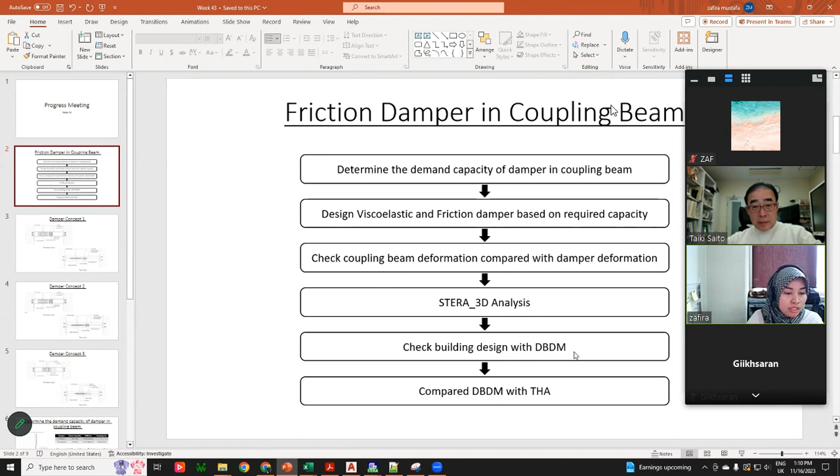So we're thinking about a few concepts. The first one, this is the viscoelastic material, and on the right side is the friction damper. Can you see properly? So here, yeah, this is concept number one. We don't know which one we should choose.

It deforms vertically. On the right side we have 4 bolts of friction damper with the spring washer, and on the left side we have the viscoelastic damper. These 4 bolts are just to hold it, they don't act like a friction damper, just to hold the viscoelastic in place so it doesn't separate when it deforms.

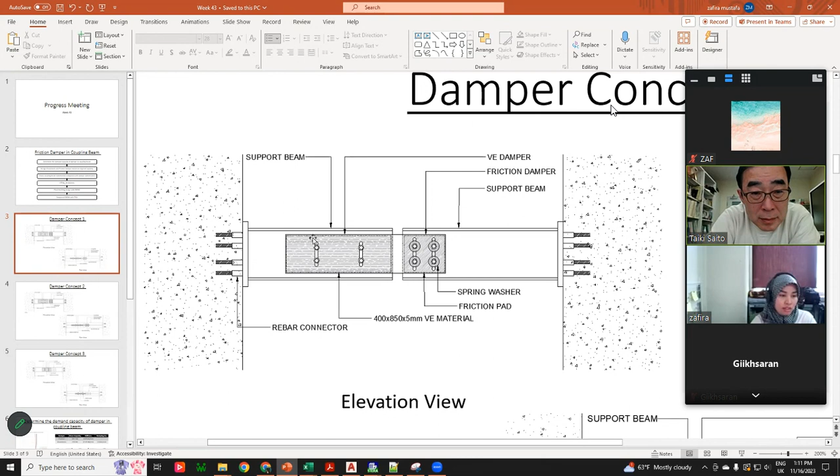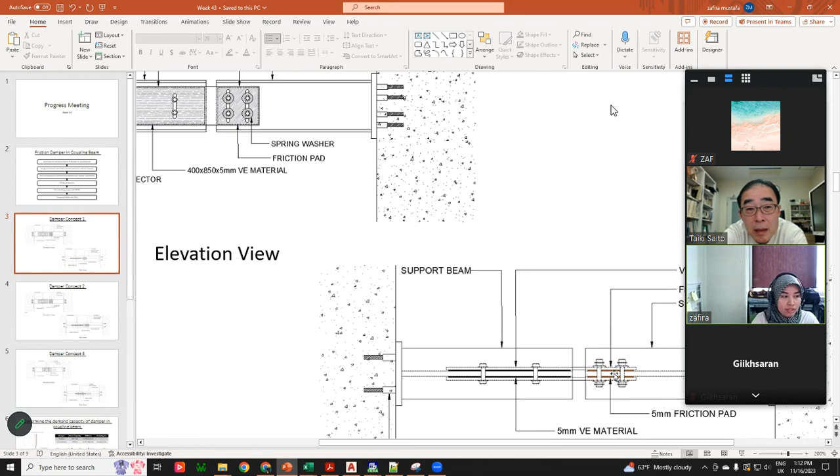And this is the plan view. So we can just use 2 layers of viscoelastic material. And for the friction damper, they also have a friction pad. This is concept number 1 I was thinking of.

So for the friction damper, it can deform vertically. For the viscoelastic, it can deform horizontally. And how does it work? How does it work? I mean, can you draw the picture of the deformation?

So this one is able to go on this side, and this can counter for axial load, so this is for shear. But can you draw the picture? Show the picture. Suppose it goes, the wall deforms like this.

For this one, it can be deformed. One goes down, one goes up, another one goes up. But this is only vertical deformation, one goes up and one goes down. And this one is two directions, one goes up, and this also can counter for axial load.

So, and the friction damper is attached to which part of the beam? One more time, Sensei, which part the friction damper is attached to. I mean, the beam is separated, yes, in the middle, right?

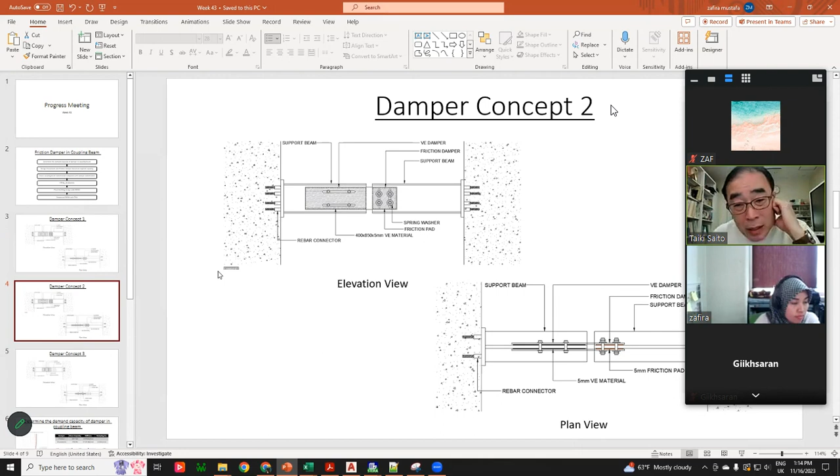Yes, so the friction damper is... this was the idea we discussed last time. So one side is friction damper, another one is viscoelastic.

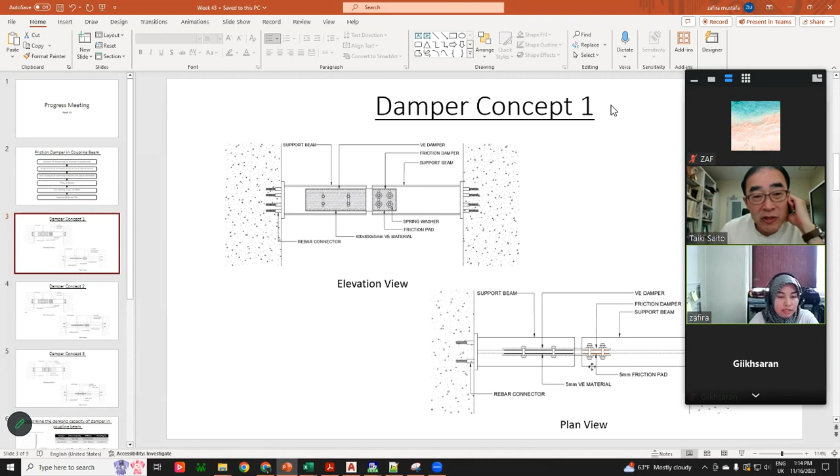So this is one steel panel, one steel panel, is that correct? This is from the plan view, the cross section. So we have two support beams, left and right, and this is the friction damper, and this is viscoelastic.

So the plate connecting the friction damper and the viscoelastic damper, are they the same plate? Yes, yes, yes, Sensei. These two panels, right, Sensei? These two plates are common. Yes, this is one.

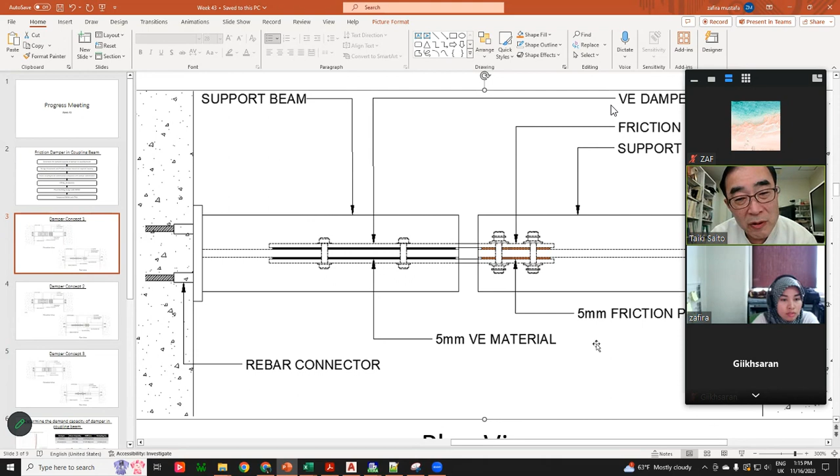So I cannot imagine how it moves. So supposedly one should go down, up, and this one should go down when the wall pushes this way. So this wall will go like this, and then it will go down. So one goes up and then one goes down.

Could you draw a picture of the plate? I mean the friction damper and the viscoelastic damper. So it should be like this, this one will be close to here, and this side will be close to this side.

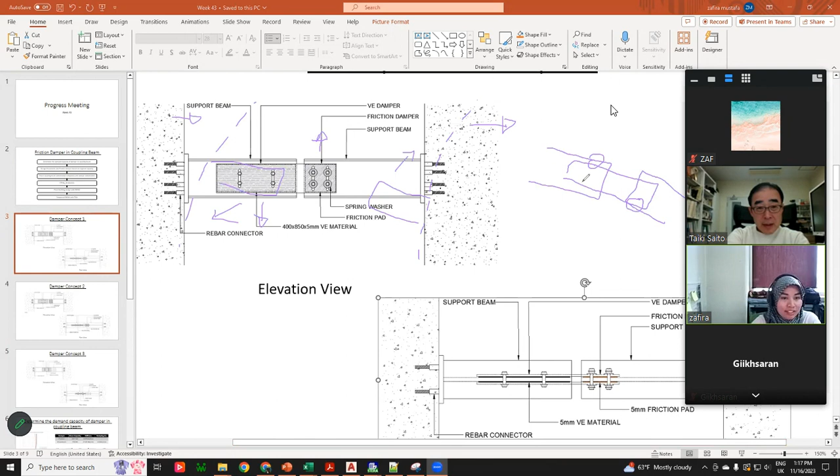Okay, anyway, could you draw it exactly? I mean the deformation, the information of it. On the screen? No, later. Handwriting. Okay, but I understand the concept.

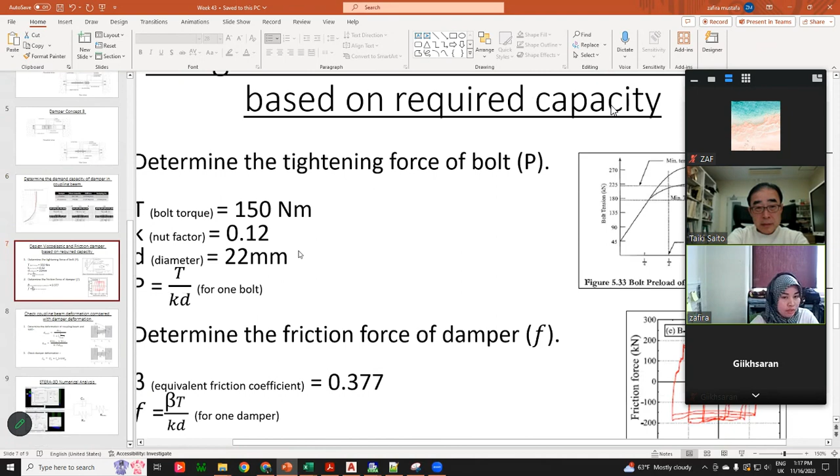And then, here I also found a few papers that determine how to calculate for the friction damper. First we have to determine the tightening force of the bolt, and then we can determine the friction force of the damper. Most of the papers say the maximum friction bolt force is about 200 kilonewton. And this is how we calculate the deformation of the damper or the beam by the deflections of the wall and coupling beams.

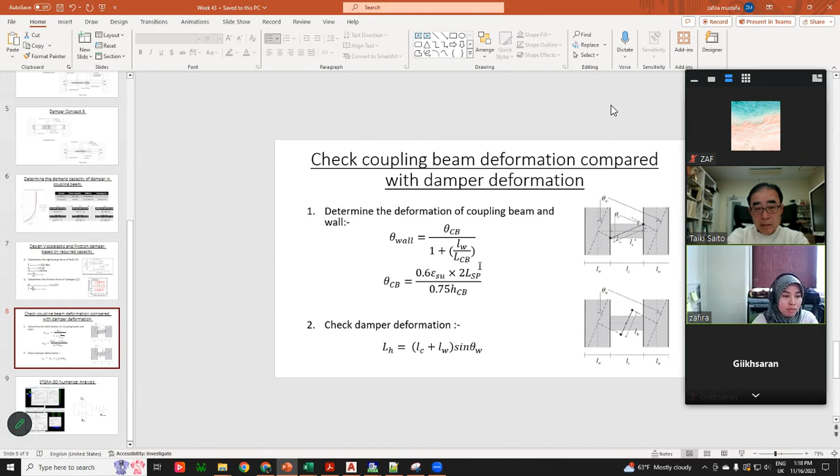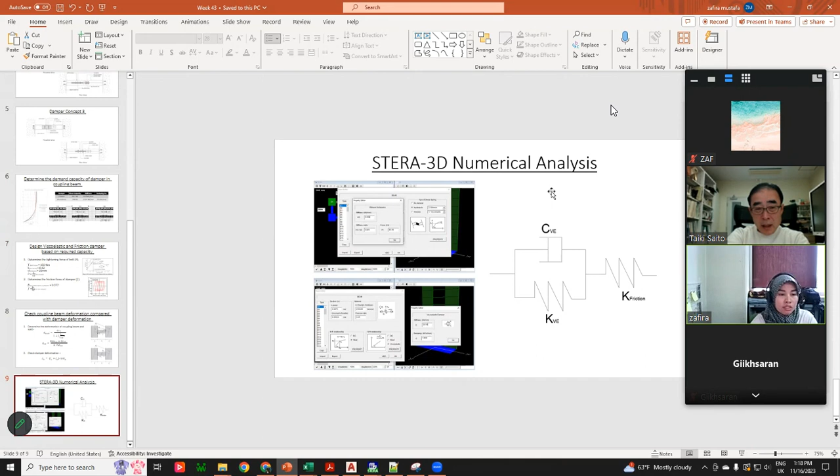My question here is, if we want to make two different dampers in the middle of the beam, how can we input that in STERA-3D? Because now for the friction damper we can use bilinear hysteresis, and for the viscoelastic we also have a viscoelastic input, but what if we combine two dampers in one element? Yeah, we must change STERA-3D. Yeah, okay.

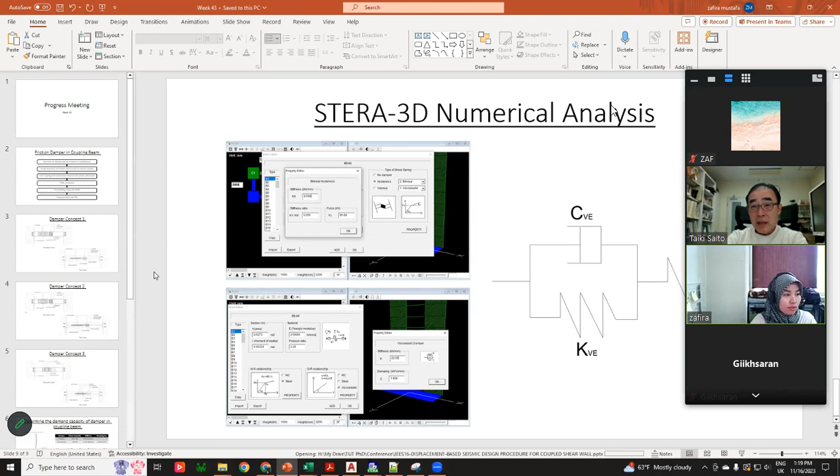How much time do you have? For today, I don't have anything. In JEES, only 12 minutes I think for presentation. For one slot, 12 minutes. Including discussion? Discussion I think about 5 minutes.

So in total, 17 minutes? Around that, but you must make sure. Okay, and you prepare the slide to fit. The presentation is 8 minutes, so you only have 8 minutes for presentation. Not including the question, right? Only for presentation, 4 minutes for question and answer.

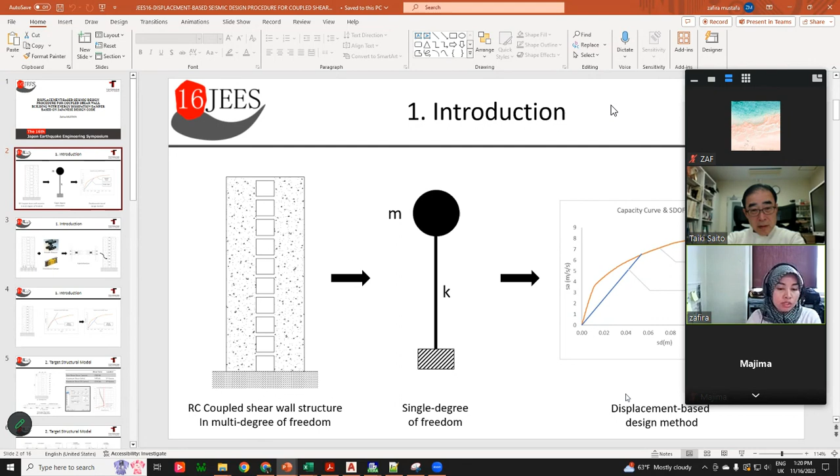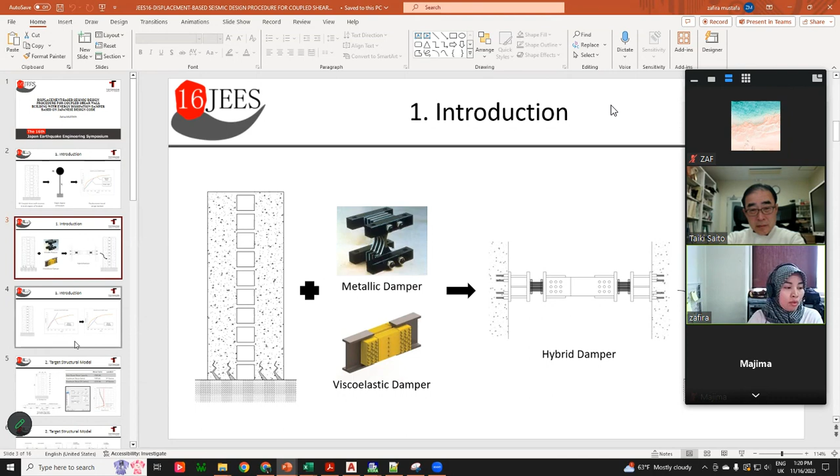Okay, so here I have 16 slides. First I explain the concept of our structure and displacement-based design. For multi-degree systems, we convert to single degree of freedom, and we use the displacement-based design method graph to determine the capacity of the building. This is the system that we propose: we have a coupled structural wall with two different dampers and a hybrid damper, and we want to check the performance of the systems. This is a simple explanation about how the performance changes after we put in the damper.

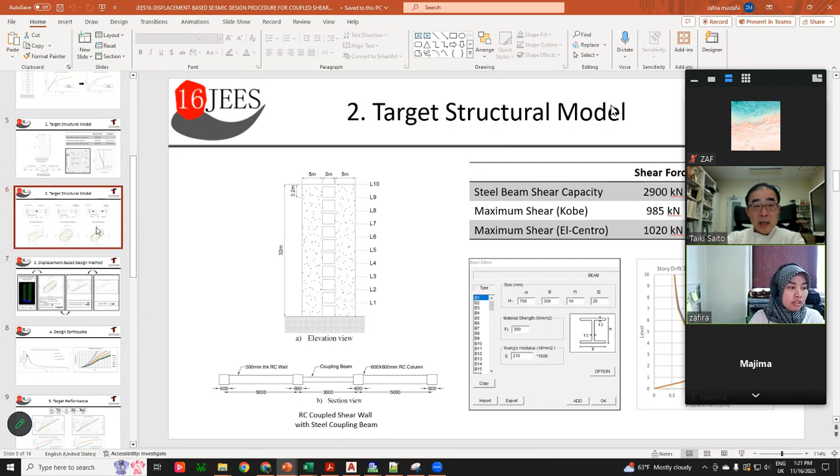Here I explain the basics of the steel damper. We use two types, one of 750 by 350 steel coupling. This is not the steel damper, this is just the steel beam only. So we want to determine the capacity for the damper. We use the steel beam, and after that we apply the metallic damper, viscoelastic damper, and hybrid damper.

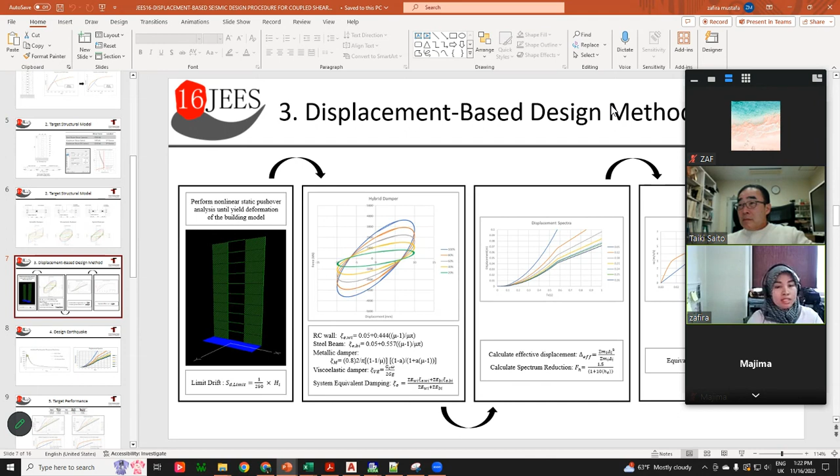After that, the design earthquake that we use for time history analysis. Then I explain the results. First we have the metallic damper, I compare 100% and 20%. After that I compare with the THA. Then I discuss the viscoelastic damper and compare with THA again. Lastly, the combinations.

Well Zafira-san, how to say... it looks the same slide, seems like the title is the same and the picture looks similar. So how do people know this is hybrid, this is steel? Maybe I can put a picture on the left side so people know when they look at this slide for the first time.

I mean, you must explain more on the slide. Okay sensei. Maybe I can put one slide here to show the damper picture, so we know which damper we are discussing.

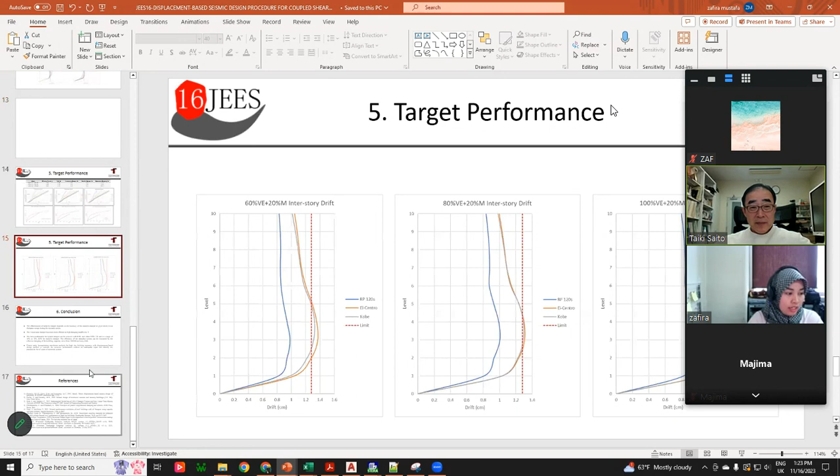And then I discuss the conclusions, and this is just the reference. I mean, this character is so small, it's so small, people don't have time to read it, so just the keyword is okay. Or you highlight the important word by putting some color. But anyway, the font size is too small.

Okay, and what is the last one? Last is just the conclusion, this is just the reference. Reference, you don't need to show it, no need to show, because you want to explain the reference, right? Yes, it's nothing to do with the presentation.

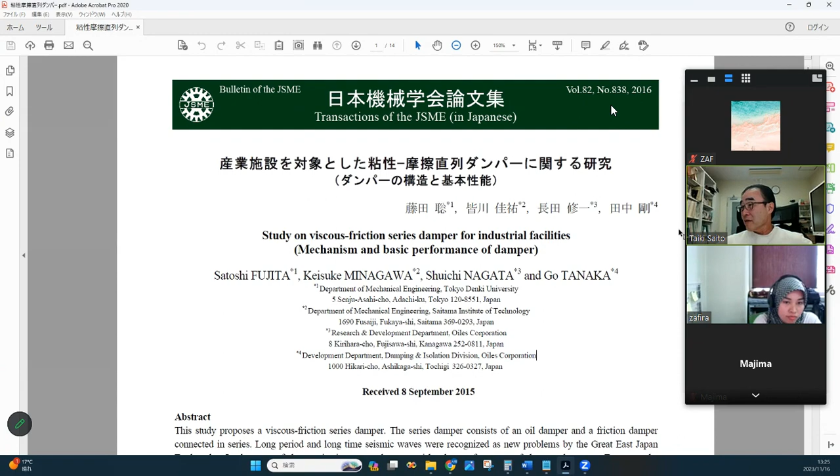This is a combination of, let's see, oil damper on the left side and friction damper on the right side, in the same direction. But the concept is similar.

Because oil damper, how to say, has an oval shape for force deformation. And if damping force exceeds friction force, it will be upper and lower limit by the friction force.

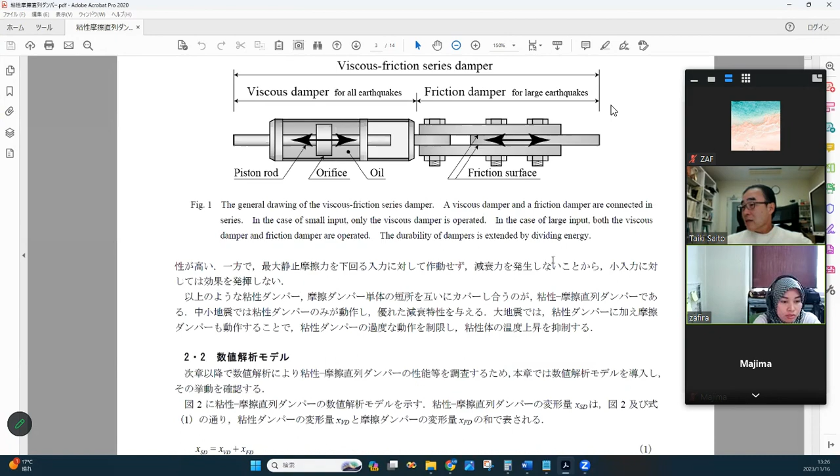So the upper limit and lower limit is this friction capacity. And inside this oval shape is like an oil damper hysteresis. And this is some analysis.

They also do some experiment. So before friction damper moves, only oil damper is moving, so the hysteresis in the middle is oval shape. And once damping force reaches friction force, friction damper starts to slide, so the force doesn't get larger. There's an upper limit and lower limit.

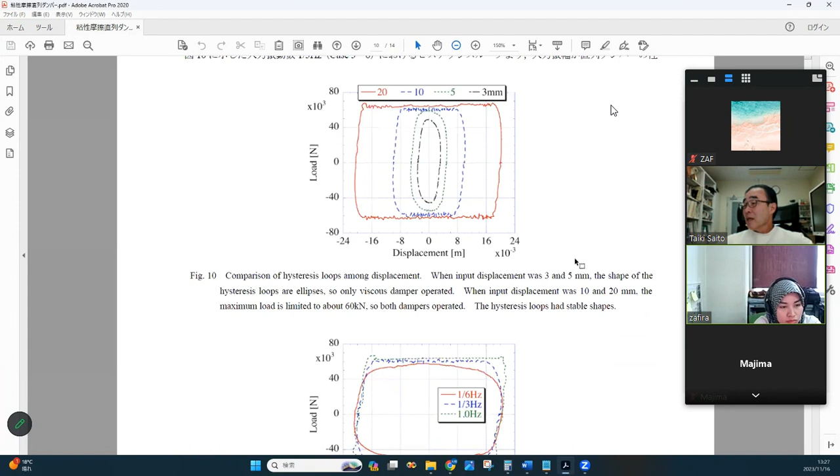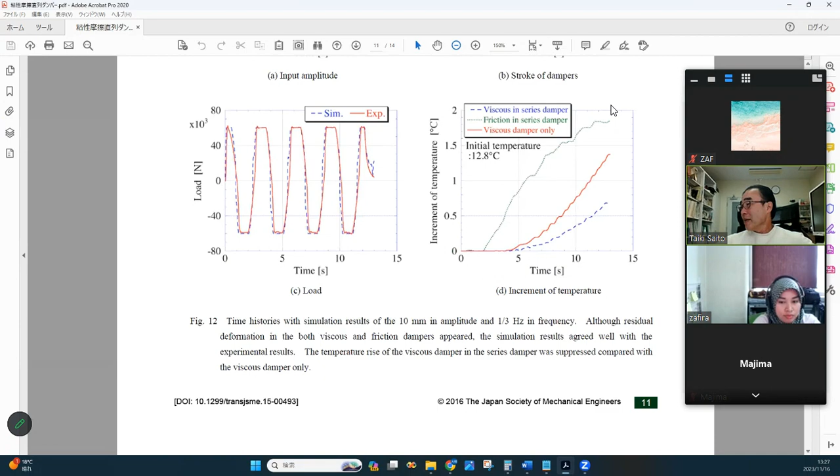So it looks very similar to the purpose of our damper. So I'm happy, I mean, people think the same purpose. Okay, also I have one more paper.

And actually, it is not published. It is under review. I was asked to review this paper, and I was surprised. It is a viscoelastic friction damper.

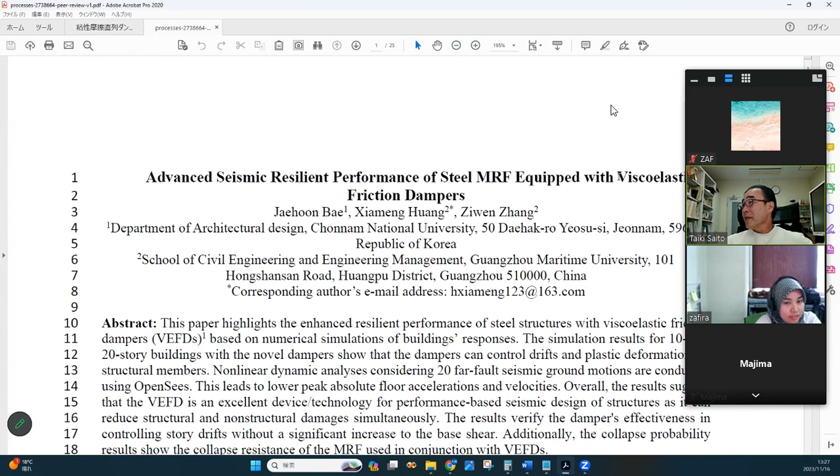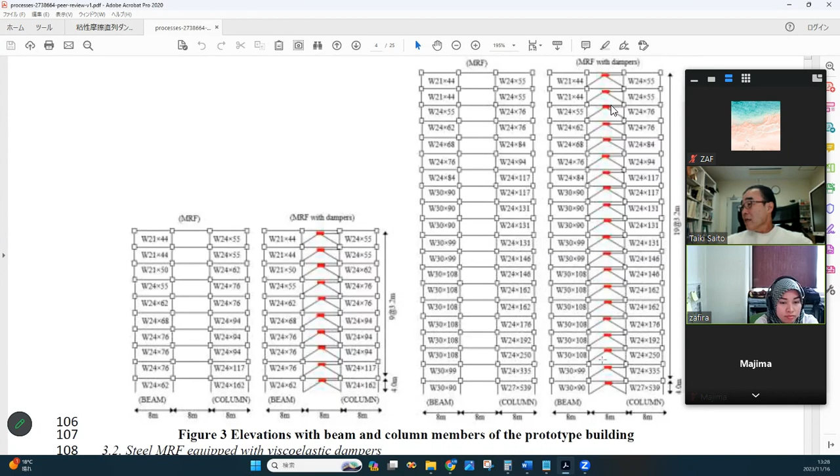So they arrange this brace in the building, and some formula, let me see. So only viscoelastic material, the hysteresis is, as you can see in the most left figure, a kind of oval shape.

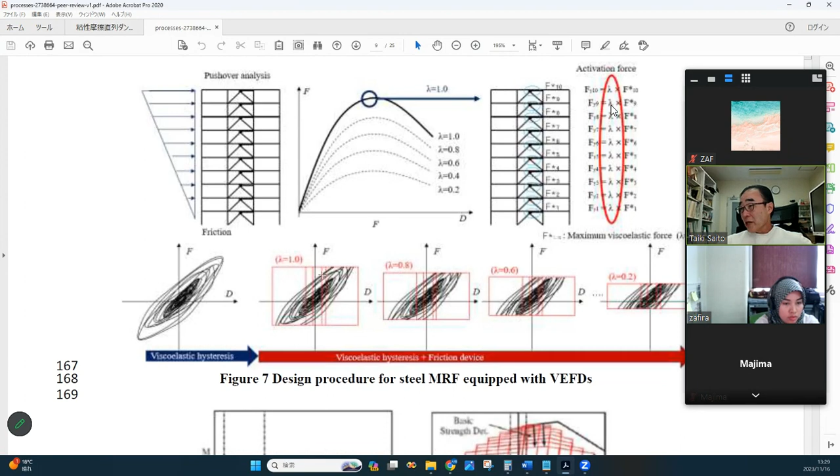But if you have a friction force, a friction damper, this is the red hysteresis, it looks like a box. But the upper and lower limit, it is the friction force. So if you combine viscoelastic damper and friction damper, the total hysteresis will be somehow, how to say, a hysteresis which has an upper and lower bound.

And what's this? So viscoelastic damper is oval shape combined with friction damper, friction device. So, our idea to connect friction damper and viscoelastic damper is not original. I was a little bit surprised.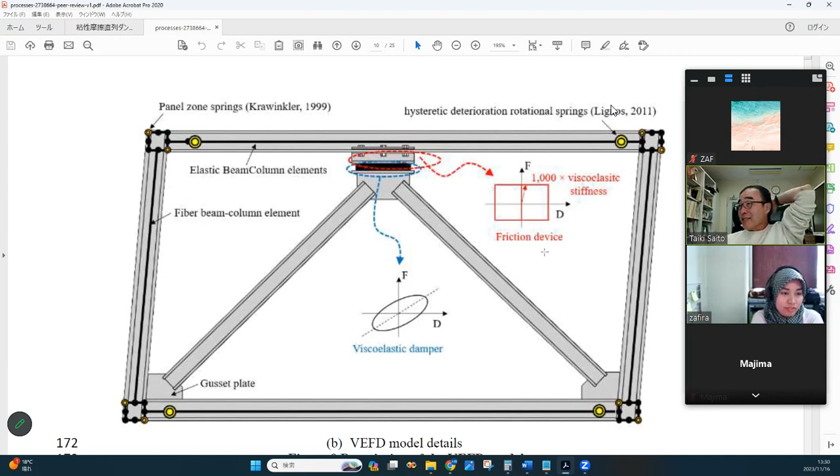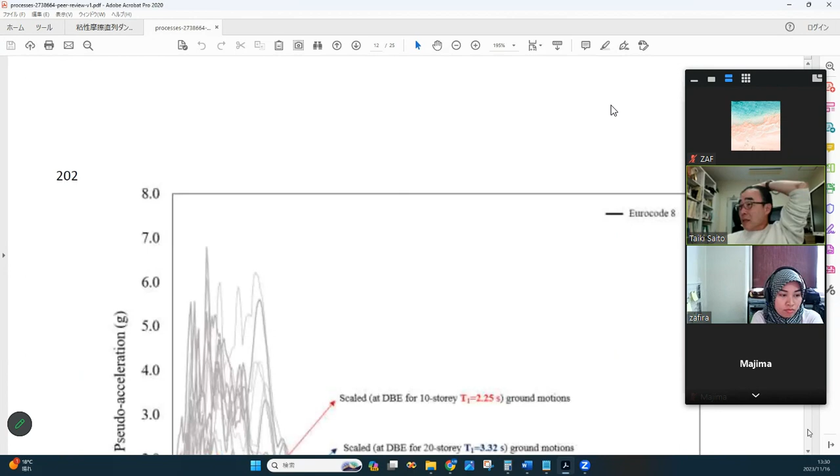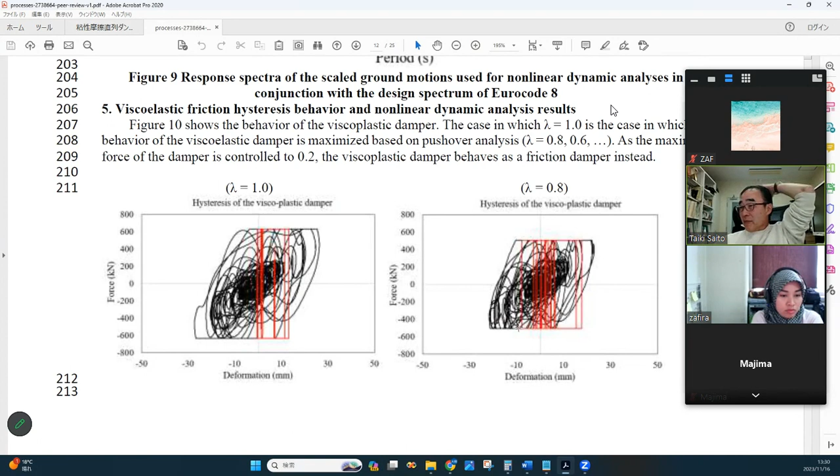But fortunately, it's not used for coupling beam. And yeah, so hysteresis is something like this. The black part in the middle is the hysteresis of only viscoelastic, and upper and lower bound is determined by friction damper. So they change friction force.

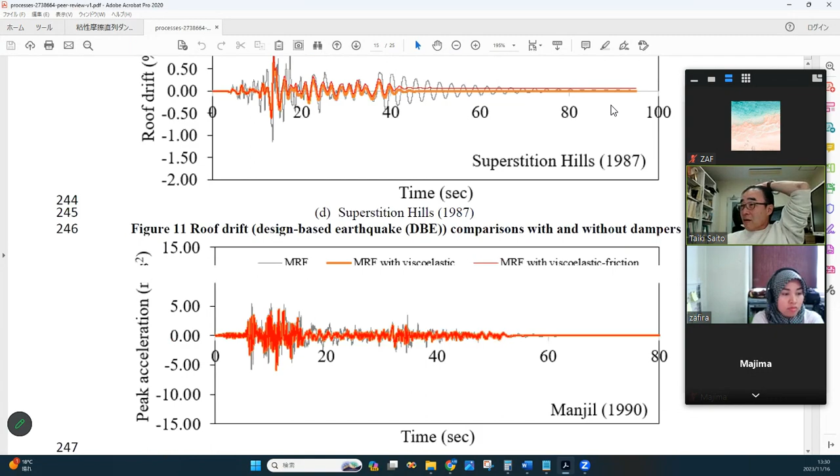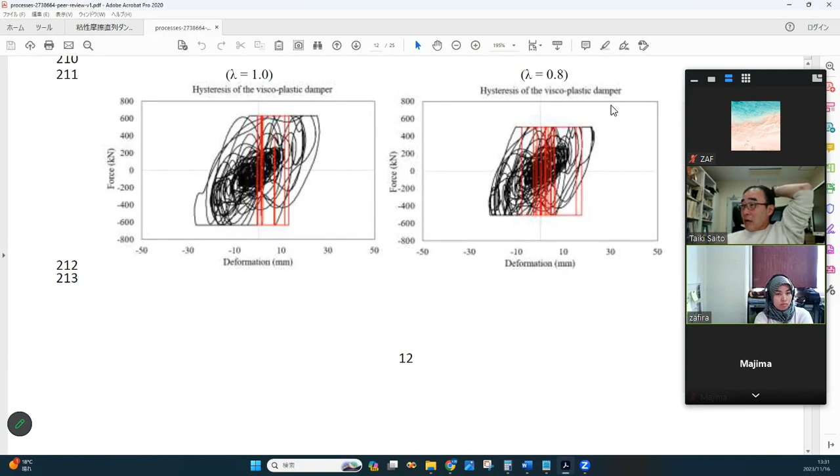So, it's not our new idea to combine two dampers. Already there are many, I don't know how many, but this paper discusses a similar idea. I can send this paper to you, but don't share it with other people, because this is under review now.

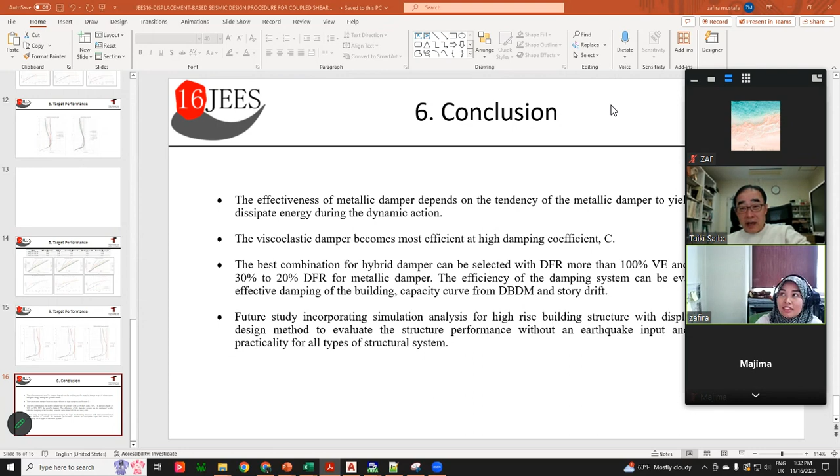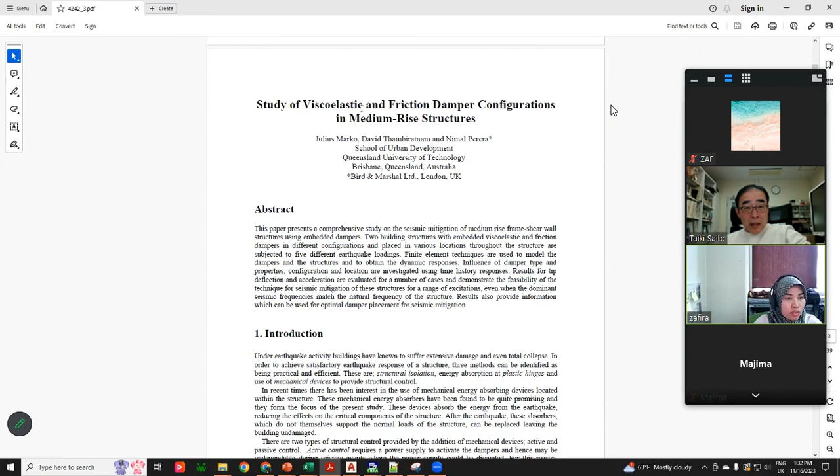This is a paper studying viscoelastic and friction damper. And I have seen this one, that's the picture, it looks like this, but I couldn't understand how it is.

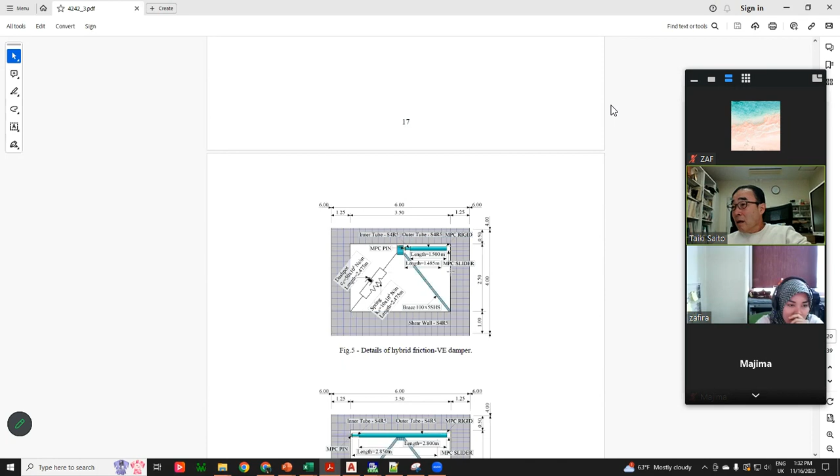Yeah, I also didn't understand the friction damper. They say this is friction damper, and sliding is on this side. I also couldn't really understand their concept.

So, which part is viscoelastic material? Friction damper is this, so detail of diagonal. It should be in this tube, sensei. Really, because he says here diagonal viscoelastic.

But there is no picture of the material, it doesn't show properly where the viscoelastic layers are. This only shows these rings, and they also say that the diagonal friction damper is this one.

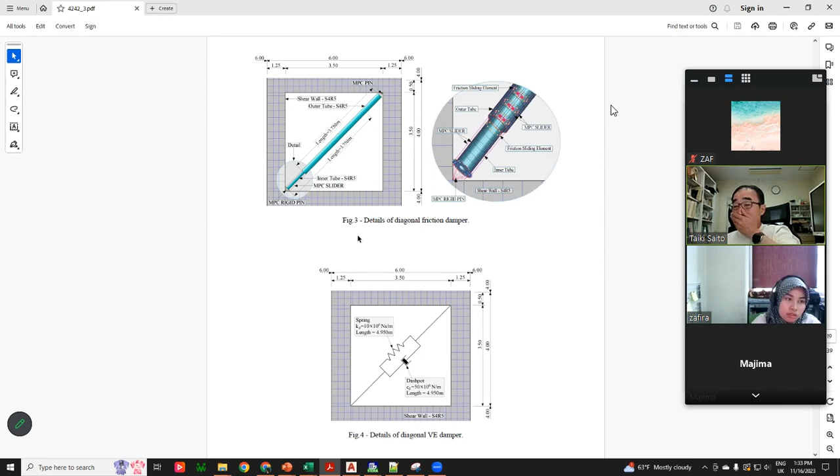And yeah, I also had to send information to Smith Moriko, but they didn't answer me. I will request the online meeting, maybe sometime next week.

Maybe we can do it after the conference, sensei. So conference is when? The 25th, on Saturday. 25th, Saturday. Okay.

Let's wait a bit. Okay, so maybe after the conference. How about in the morning of the 27th, Monday? I'm okay, sensei. Let's say 9:30 in the morning. Or how about the 29th? The 29th also, I'm free, sensei.

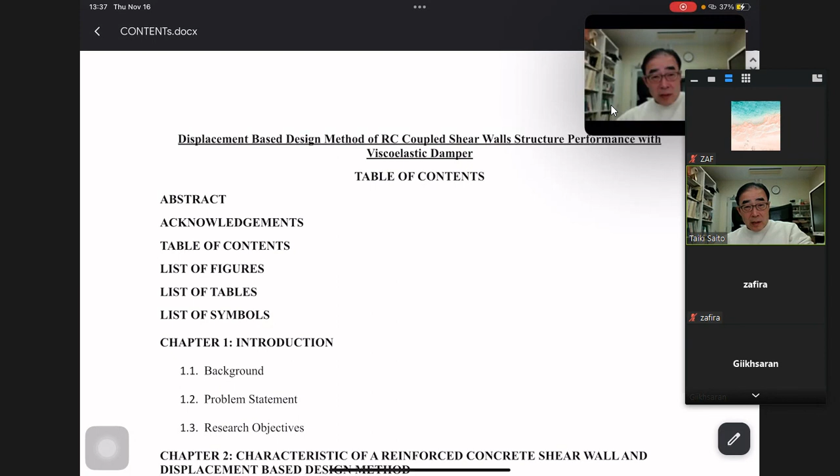Maybe you can delete 'performance'. So: displacement-based design method of reinforced concrete coupled shear wall structures. Shear wall structures or shear walls? Shear wall structure is okay, with viscoelastic damper. So maybe you should delete 'performance'.

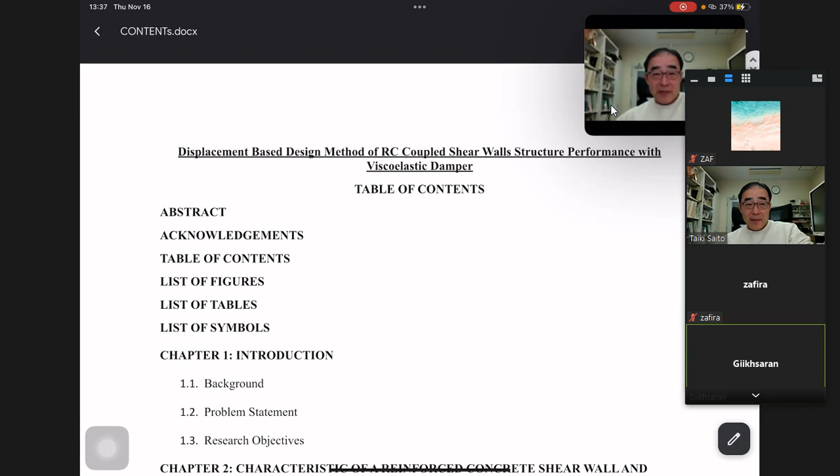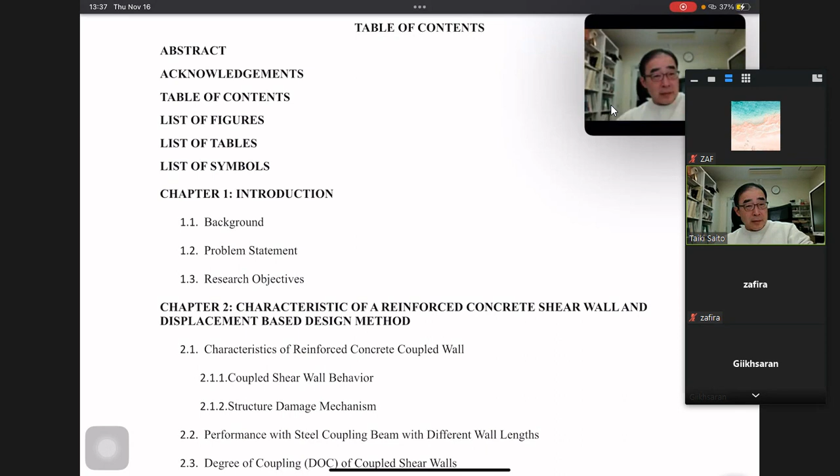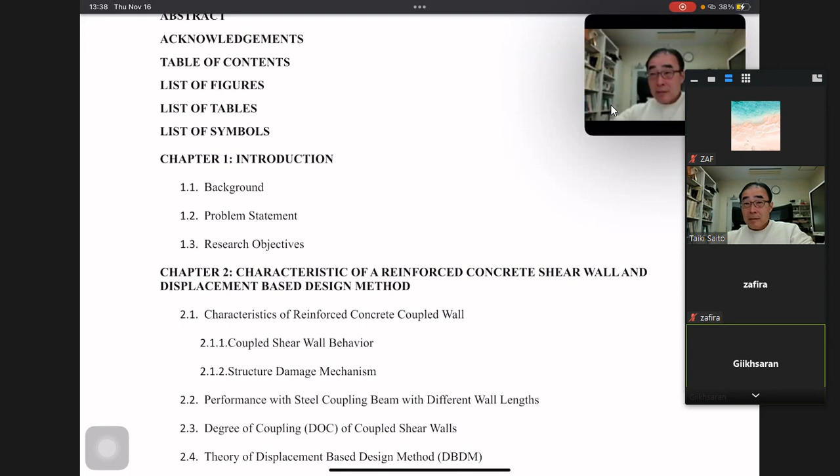Okay, and what is first: the abstract, acknowledgement, table of contents, list of figures, list of tables, and last one is list of symbols. In the table of contents, chapter 1 is introduction, including the background,

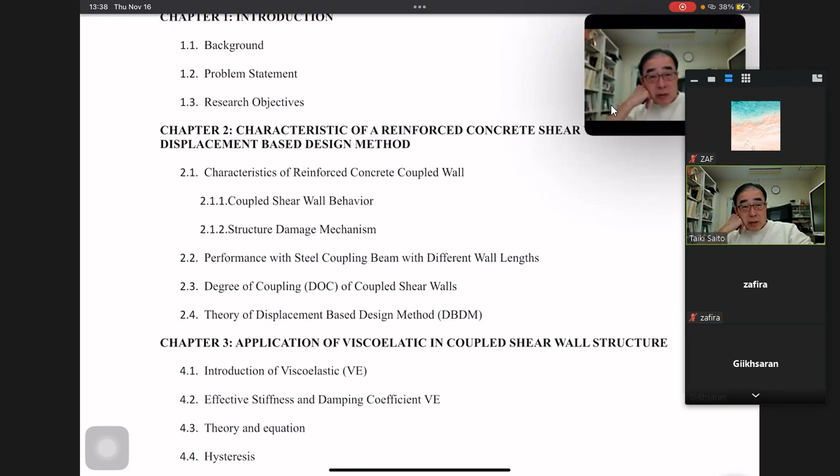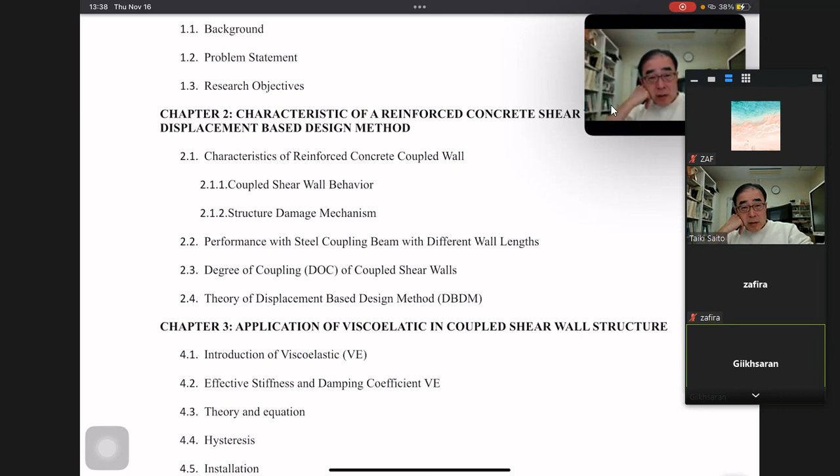problem statement, and research objectives. Chapter 2 is characteristics of reinforced concrete shear walls and displacement-based design method. The first is characteristics of the RC coupled wall, including coupled shear wall behavior, and the final one is structure damage mechanism.

Second is the performance with steel coupling beams with different wall lengths. Third is degree of coupling of coupled shear walls. Fourth is theory of displacement-based design method. Chapter 3 is application of viscoelastic dampers in coupled shear wall structures.

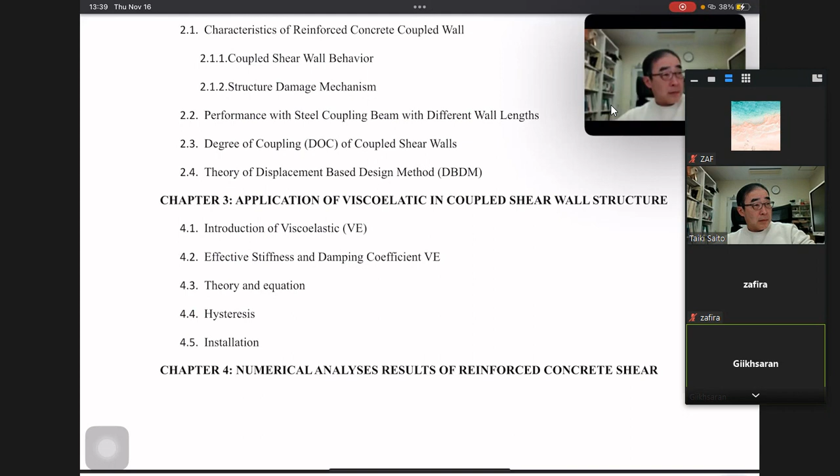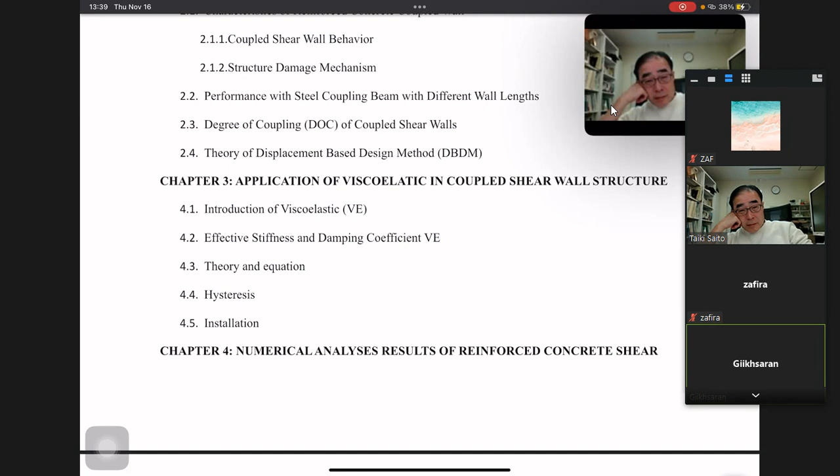First is introduction of viscoelastic damper, second is effective stiffness and damping coefficient of viscoelastic, third is theory and equations, fourth is hysteresis, and final one is installation.

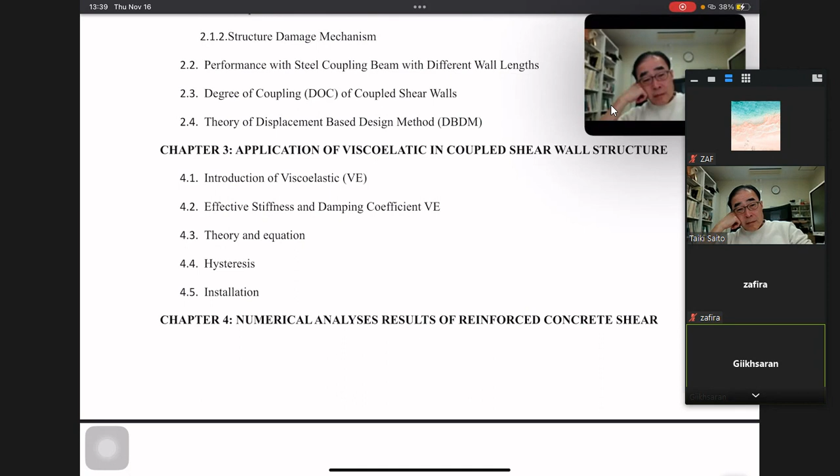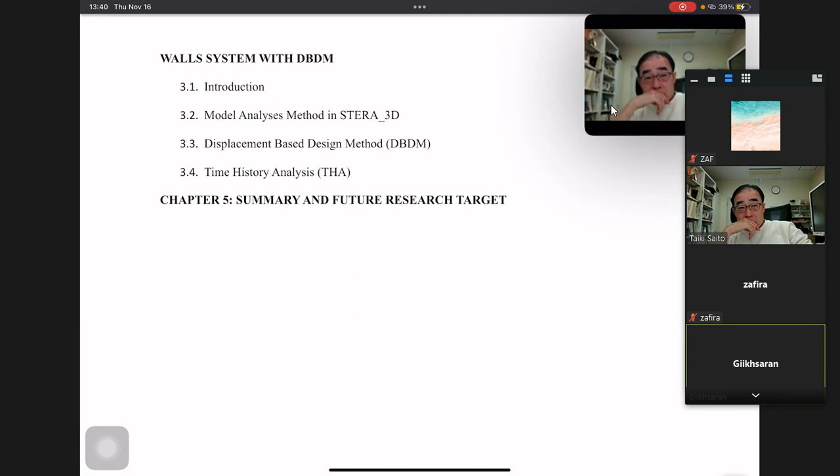Chapter 4 is numerical analysis results of the reinforced concrete shear wall system with displacement-based design method. First is introduction and model analysis method in STERA 3D. Third is displacement-based design method. Final one is time history analysis. Chapter 5 is summary and future research targets.

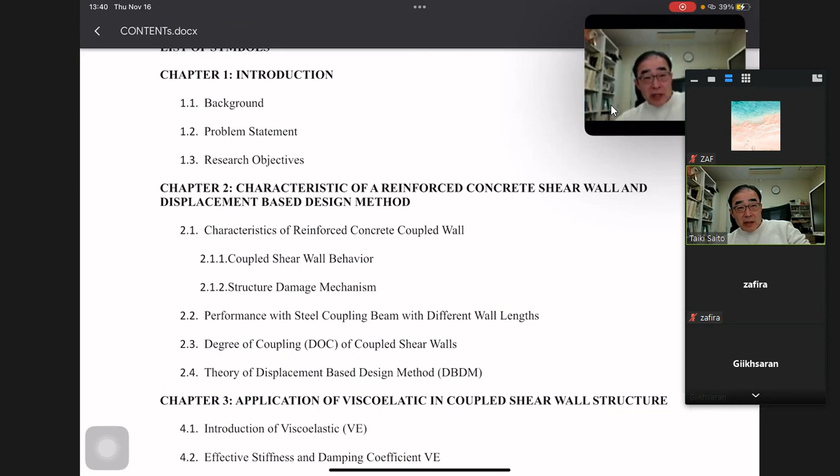Could you go up? Chapter 3, okay, why does chapter 3 have section 4.1? It must be 3.1. And chapter 4, you put 3.1, but it must be 4.1. Okay, I see.

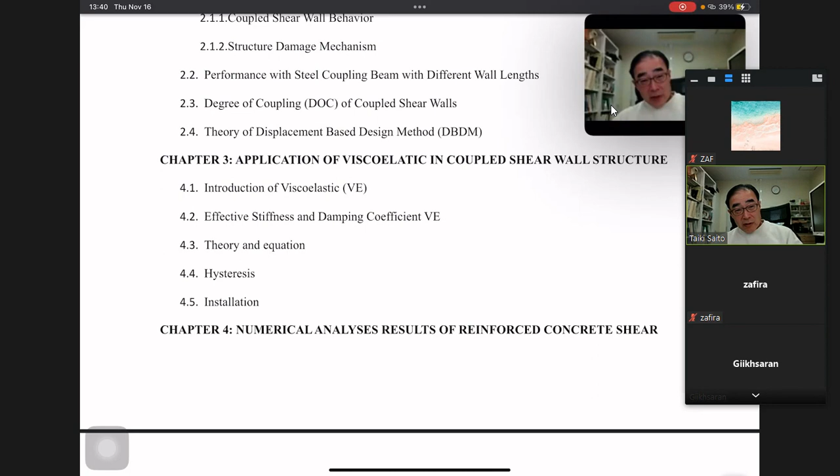Maybe you can put one more section. I mean, input ground motion in chapter... no, chapter 4. You must explain input ground motion before the time history analysis. Okay, I see.

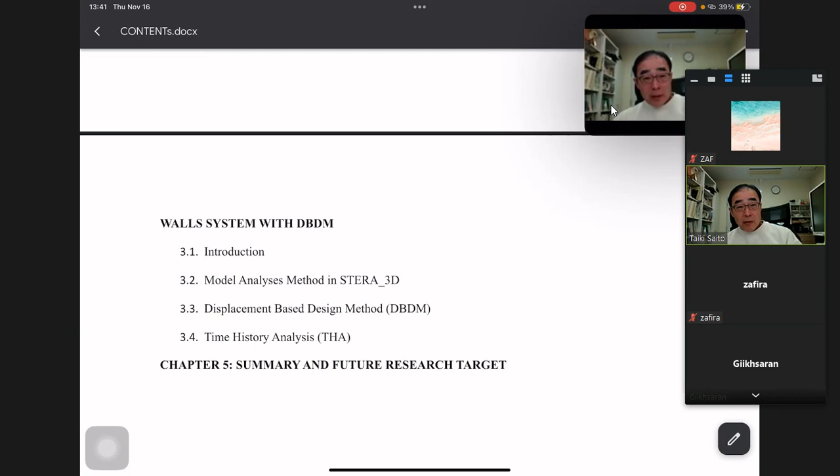Okay, so please start writing. Okay, thank you. Can I stop the screen share? Okay, yeah, thank you, sensei.

So Hatayo-san, you are next. You also must prepare the presentation, right? Did you make a slide, PowerPoint? Yes, thank you. I made some slides, but before that there's something that I did.

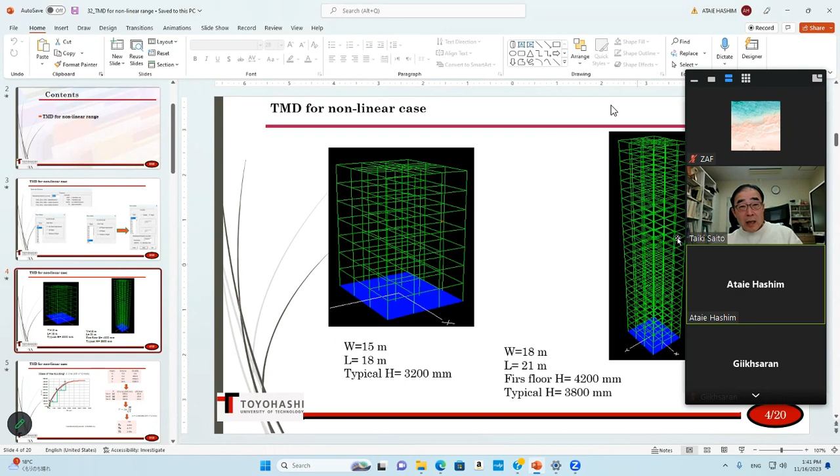So I did a pushover analysis and divided this into three segments, and found the stiffness for each segment and changed it to periods using the mass of the building. These are the time periods in these three segments, but the fundamental period found by STERA is 0.922, a little bit smaller than the first.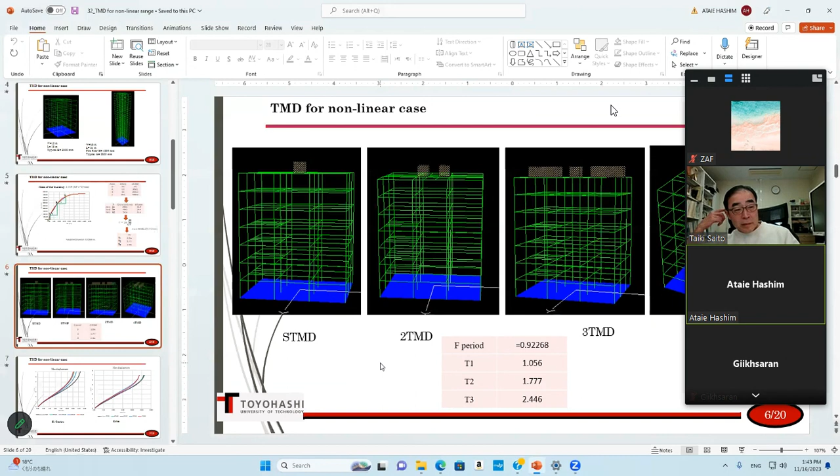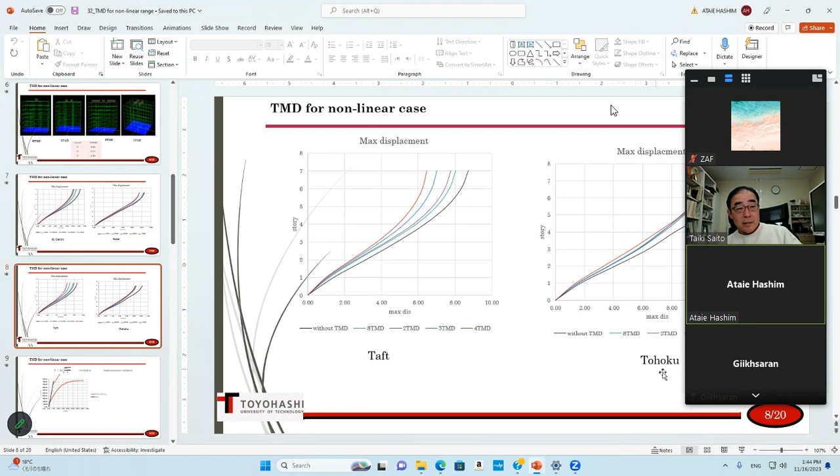So I installed 4 TMDs tuned with each of these periods. This is under El Centro: without TMD is the black line, below that is 3 TMD, and the best performance is with 4 TMD. Under Kobe, 3 and 4 also have better performance, while 2 and single TMD almost didn't decrease the displacement. Under Taft, 4 TMD and 3 TMD have better performance, and under Tohoku, almost all of them have the same performance. I don't know...

So actually, when we control the first mode of the building, when we calculate the time period, we should use effective mass, because only this much mass contributes to the first mode, not all of the mass. So if we calculate the first period this way, it's almost the same as the STERA output, very close. So it means it's okay to use effective mass instead of total mass.

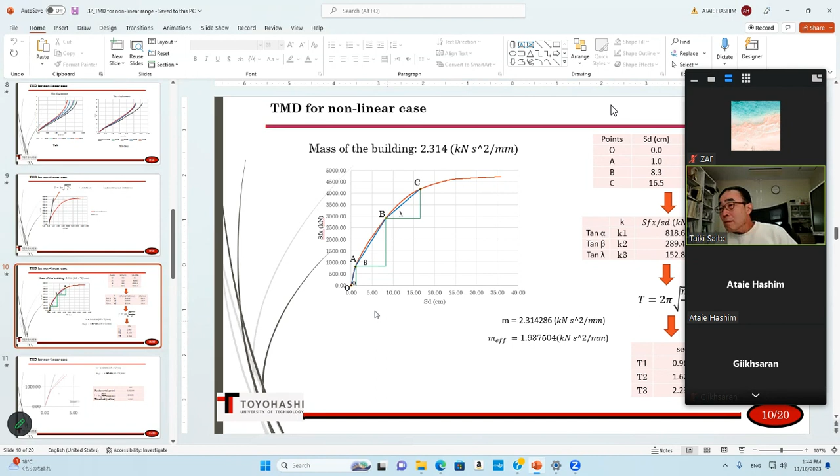So I used the effective mass for these 3 segments. In the origin, this first segment, the red line is the idealized pushover curve, and the black line is the linear pushover analysis. There's a little bit of difference, but if we overlap it, we can, though it's just idealized, not completely overlapping.

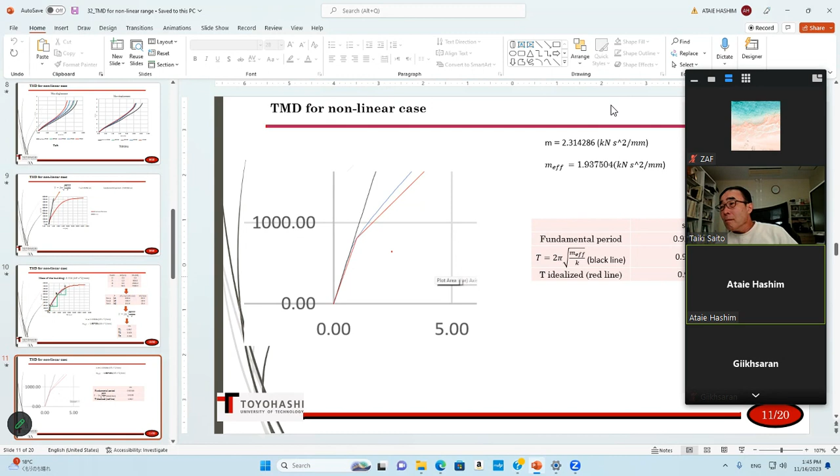This fundamental period by STERA, the black line, is very close to the red line, also a little bit larger, but almost all of them are the same. So I used that method for effective mass to calculate the period for these 3 segments.

Then this is the fundamental period, blue line. Green line is a single TMD, which is tuned to area 1, in the middle. And the red line is tuned to this segment. So in this case, you put only 1 TMD.

Yes Sensei, I compared. It shows that when we tune the TMD to the middle part, it reduces the displacement much better than these 2 areas.

Under the Kobe record also the same. It means that area 2 and the fundamental period cannot decrease the displacement as much.

Under Taft also, this middle part gives a better result. And under Tohoku, it's a little bit different - the fundamental period gives a better result than the other 2.

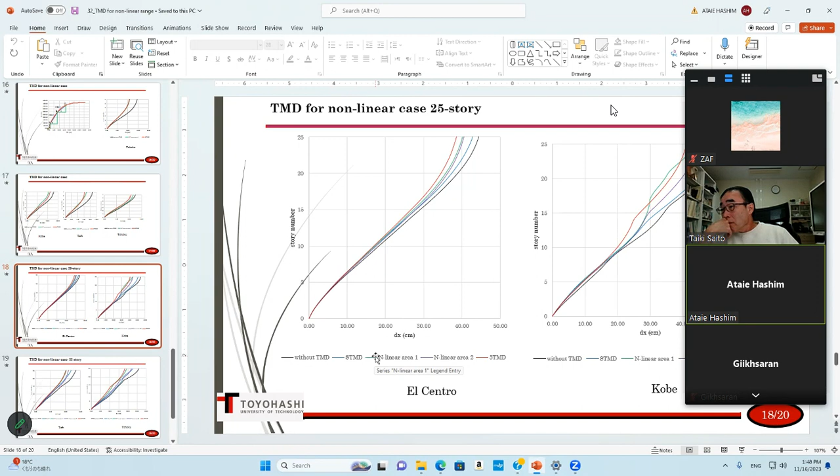The 3TMD and the TMD tuned to the middle part of the pushover curve give a better result - the red and green lines.

For Taft and Kobe also, red and green line. Green line is tuned to the middle part and red line is the TMD which is tuned to all three parts.

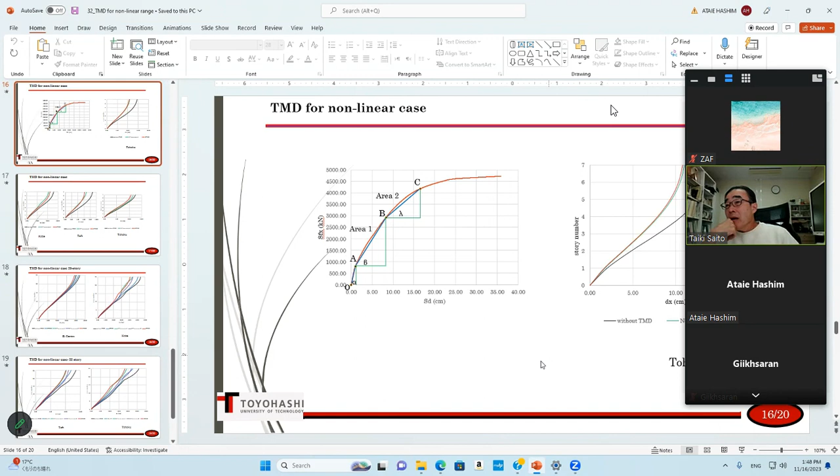And that's all. Very good - yeah, you can write one paper about this. Okay, thank you, I will take it.

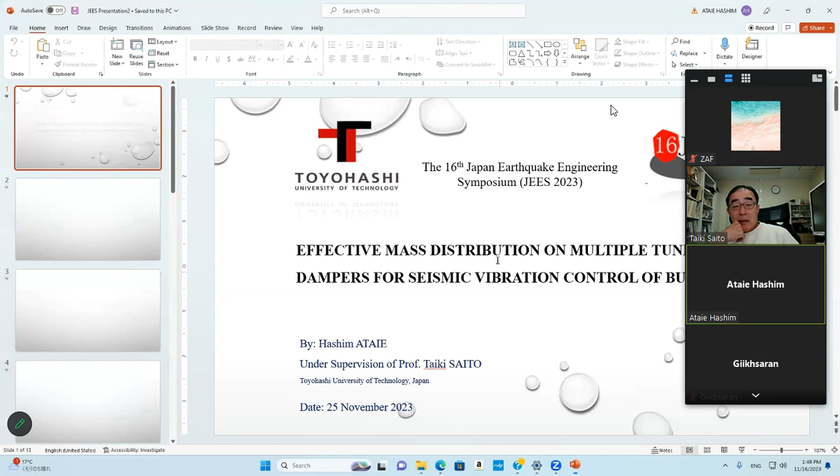It's just not completely complete. This is the JEES center. I don't know if these parts are okay, I'm just not sure about this. It's okay, it's okay.

So this is the content: introduction, literature review, objectives, methodology, results and discussion, and further work. It's a little bit of introduction about how single TMD is and how multiple TMD is, and which are the key factors in multiple TMD - mass ratio, damping ratio, and frequency ratio. So this is the literature review.

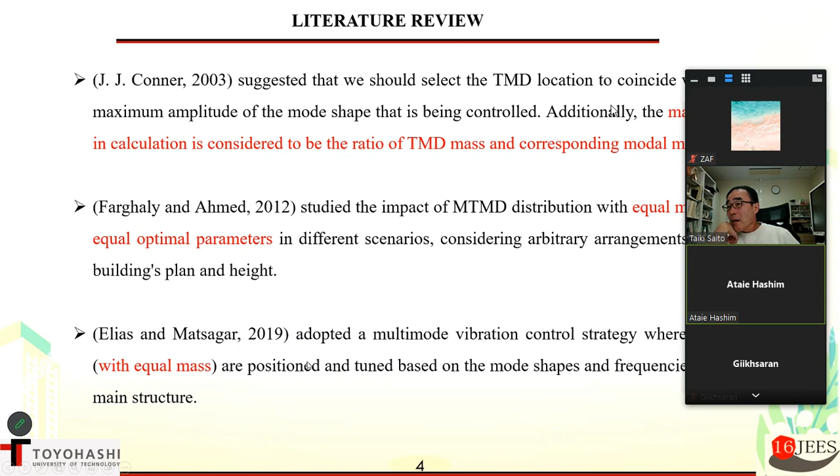So this is the objective.

That's why I use participation factor and effective mass ratio for mass allocation, because participation factor shows the ratio of contribution of each mode to the total ground acceleration, and effective mass ratio provides insight into how much of the total mass is involved in a specific mode.

Ataie-san, could you explain what you have done? This is just like a mass allocation method, based on effective mass ratio and participation factor.

This is - I allocated mass to each TMD. Those TMDs are responsible for different modes, and mass allocation is conducted based on effective mass ratio and participation factor.

But you must explain what kind of building you are talking about. Where is the building? Since linear dynamic analysis is using a lumped mass model, this is the procedure.

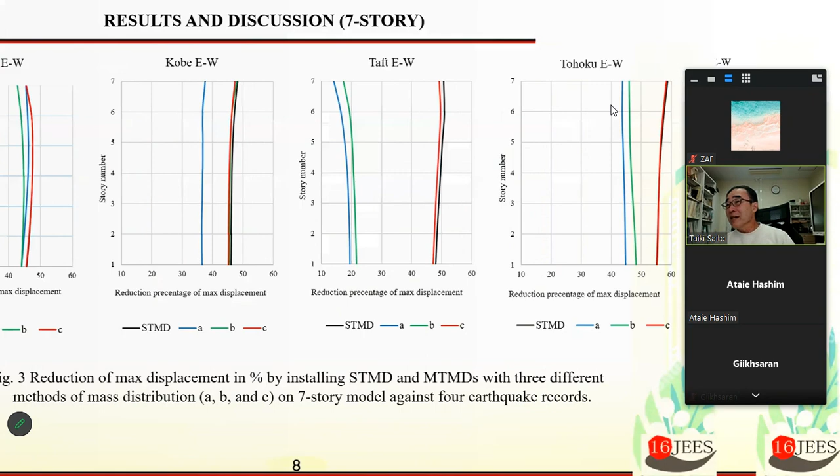Well, this is a stress-related analysis, but in a real building you cannot put the TMD like this—it looks like a cantilever. Yes, it's just a model, like many researchers use this kind of model. This is not the real building, it's just a model.

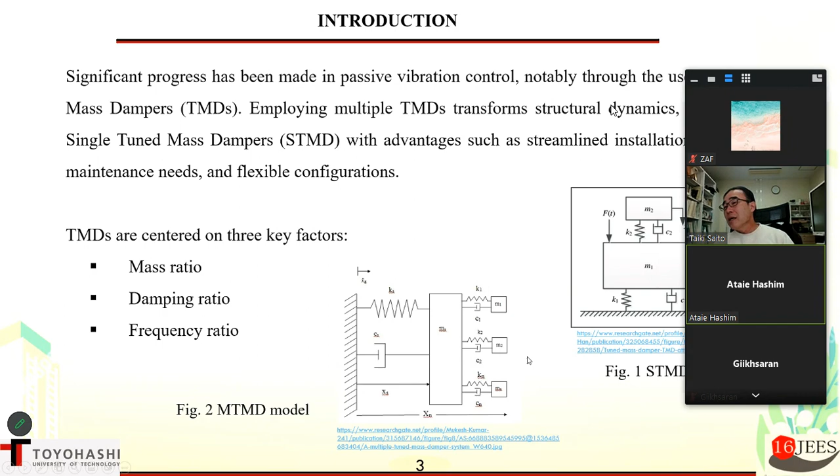So then I will include a picture of the model here, Sensei. Yeah.

Okay, Sensei, and this is the three methods of mass allocation to each TMD: equal mass, mass based on modal mass, and mass based on participation factor and effective mass ratio. So this is method A, B, C. Okay, could you go to the next slide?

So this is the result for the 7-story building, which shows that the black line is actually the single TMD, but these three—blue, green, and red lines—are for the three methods of mass allocation, where in each case the mass allocation based on participation factor and effective mass ratio is better, shown by the red line.

So from here, what is your conclusion? Which one is better, the blue one? Red line is a reduction percentage—this much, for example, about 50% reduces the displacement, but these two methods reduce displacement by about 20%. So the red line is better than these two.

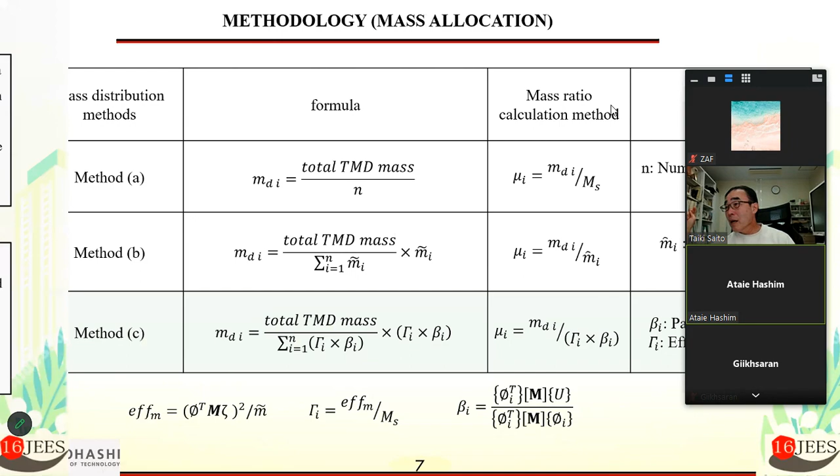And where is the location of the TMD? I just explained here a little, but there's no figure. We use the maximum amplitude of the corresponding mode to decide the location of the TMD.

I don't understand. You have only 8 minutes. Okay, Sensei, then I will put a figure in. Please think about people seeing this slide for the first time—do you think people will understand what you're doing?

Actually, because the time is limited, maybe not. So you must use a picture. Okay, Sensei, so people can understand the picture at first sight. If you have 3 masses, you must make a picture with 3 mass TMD.

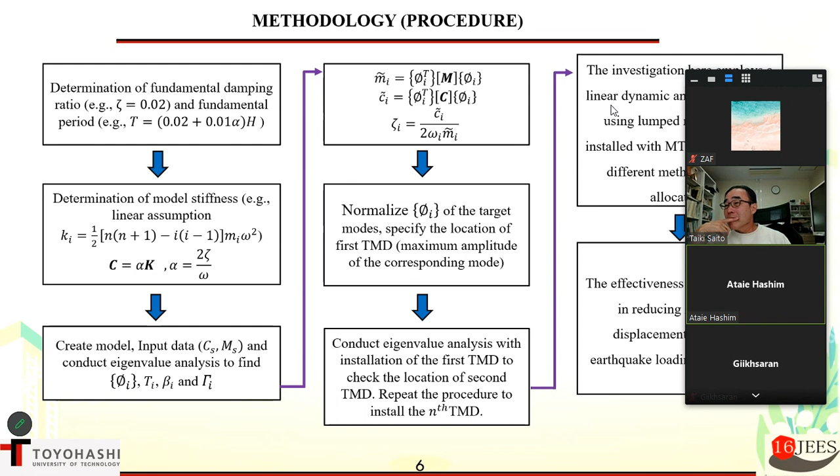Okay, Sensei. So don't show the equation—people don't understand the equation. Okay, Sensei.

So I will modify it and show it, Sensei, maybe face to face in your office—I don't know, next week. Yeah, if you modify the slide, please contact me. Okay, Sensei.

And what is this one? You have 7-story and 20-story. It's only that one story, Sensei. Yeah, I have two—7-story and 20-story, but this figure is for the 20-story. So also you must show the slide with the 7-story building with 3 TMD and the 20-story building with 3 TMD. It's clear if you show the picture, otherwise people don't understand.

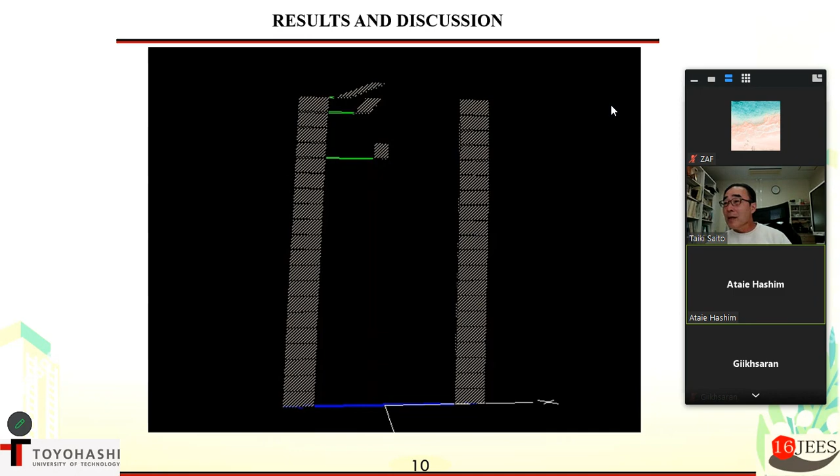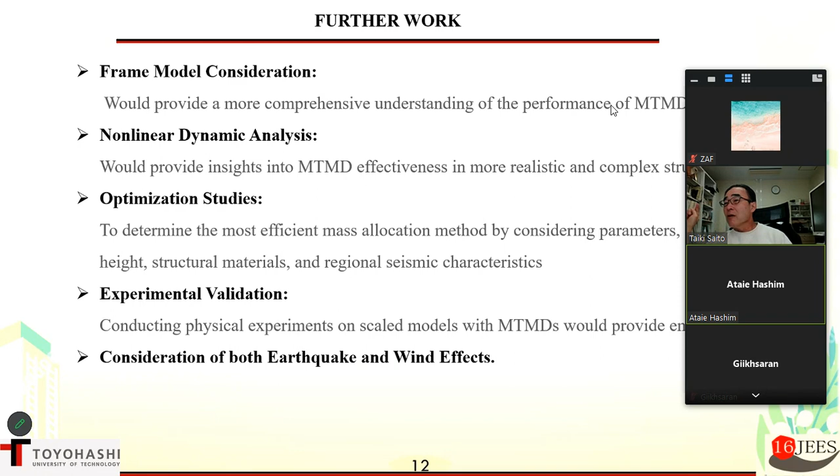Okay, and this is the conclusion. And this is the future work. I don't know if it is needed—no, it's not necessary, so I will delete it. You can delete it. Yeah, and finish, Sensei. Okay.

Ahmed-san, do you have anything you can show me today? Today, no, Sensei. No?